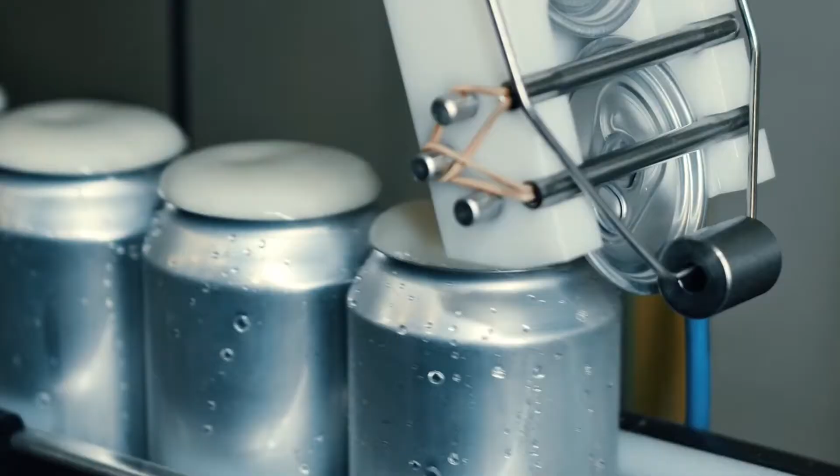Welcome to our third Flexibility Moment. Our webinar today will introduce you to the world of breweries.

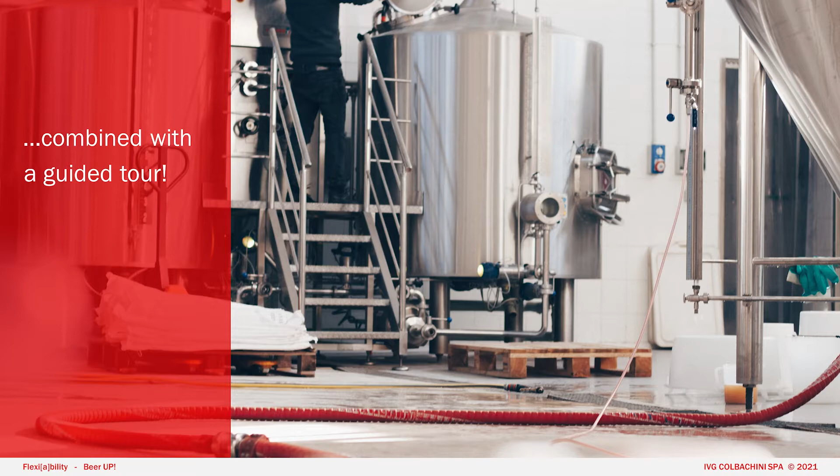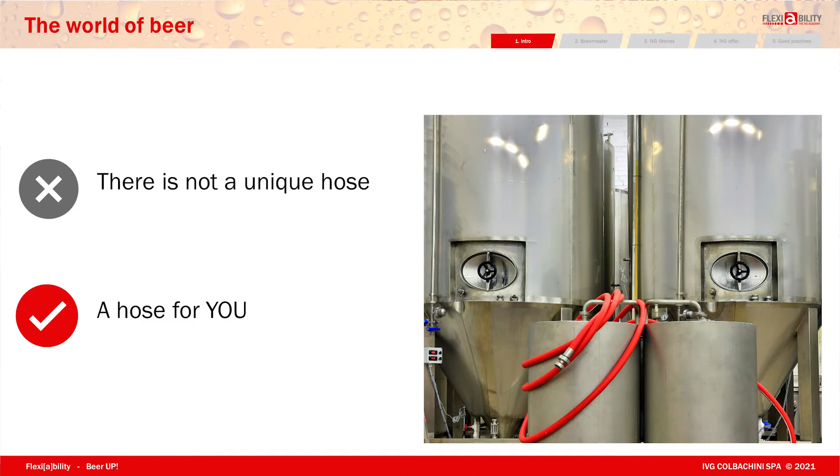It's very important, and I loved it - I tried it once in my life. You can see how the beer is made, and if you love beer, this is nice to learn. You can also show the beauty of our red hoses, so why not? Let's try. Thank you everybody for these few minutes with me.

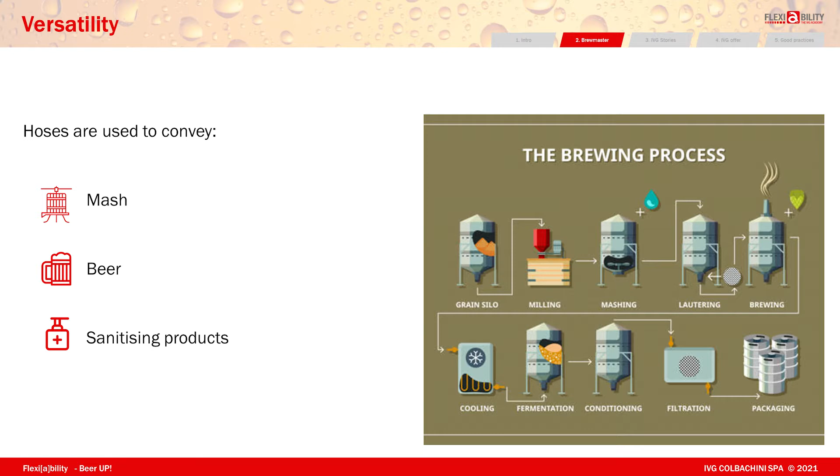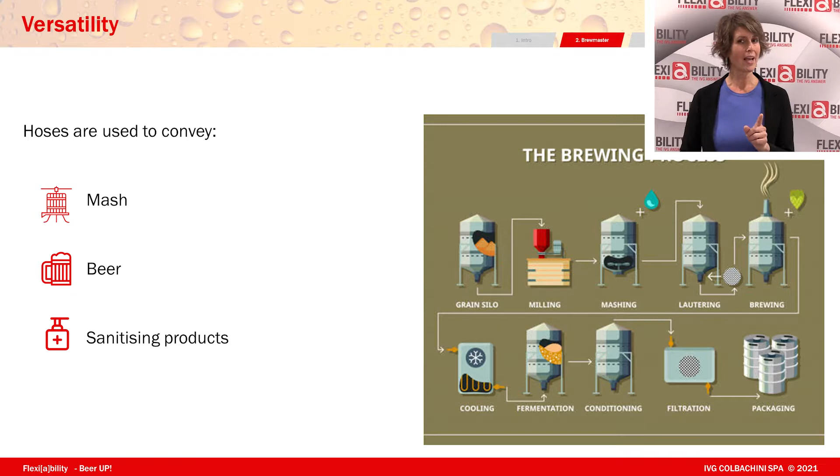Another important aspect for the brewmaster is versatility. The brewing process requires a lot out of a hose - it has to convey mash, beer, and a variety of chemical products. Some of these chemical products can even run at 80 degrees for up to 60 minutes, which is why it's important to talk about strength.

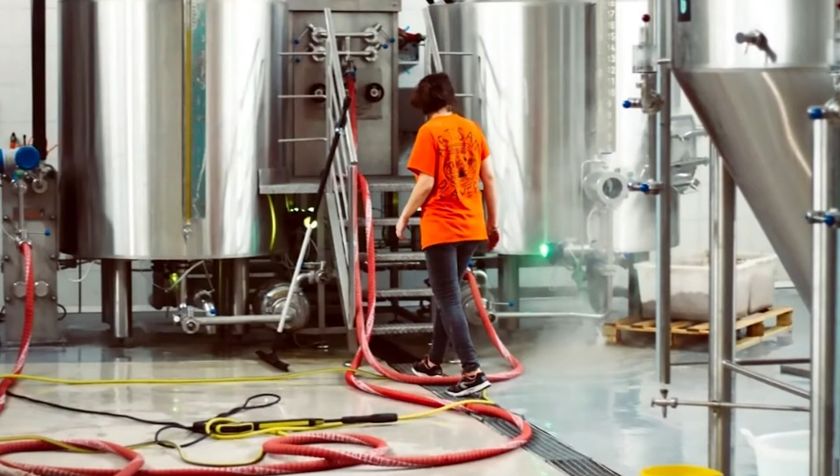Every day, hoses are subject to a variety of stress, depending on the equipment they are used on, the pressure ratings, and the temperatures, which can vary greatly from 0 degrees conveying beer up to 80 degrees for an hour conveying chemical products. Finding the right hose that can handle all these variables is important.

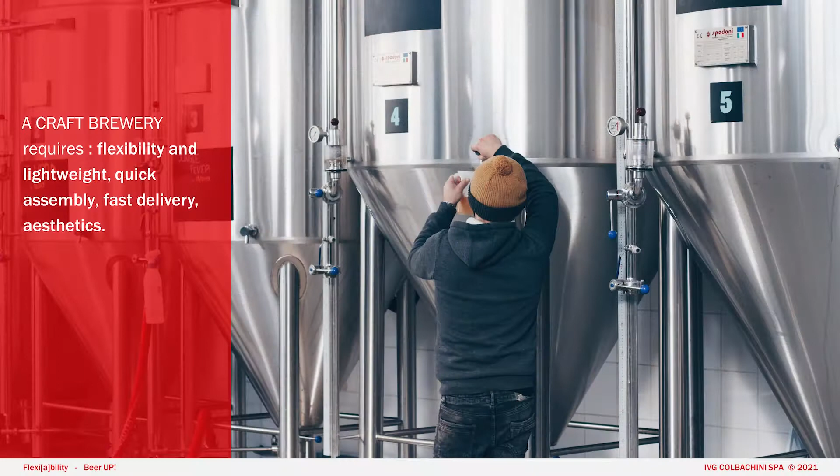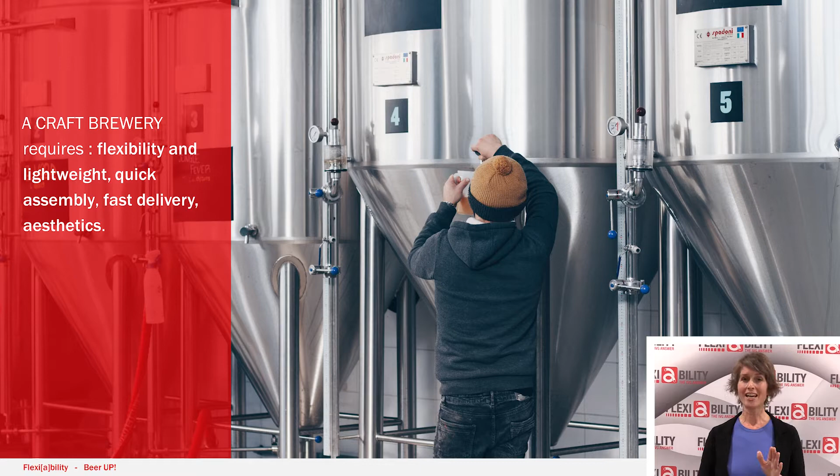As a rubber manufacturer, we like to think of the rubber hose as a trustworthy partner that can offer stability and duration over time. In a craft brewery, it's important to have a flexible hose. The same hose is used in all production phases and is manually moved from one piece of equipment to another by the operator, which is why it's also important to have a lightweight hose.

Substitutions of a hose are common. It's important to have a hose on spot that can be fitted by the operator, and thanks to our Easy Shell patented system, that can be done in just a couple of minutes on site.

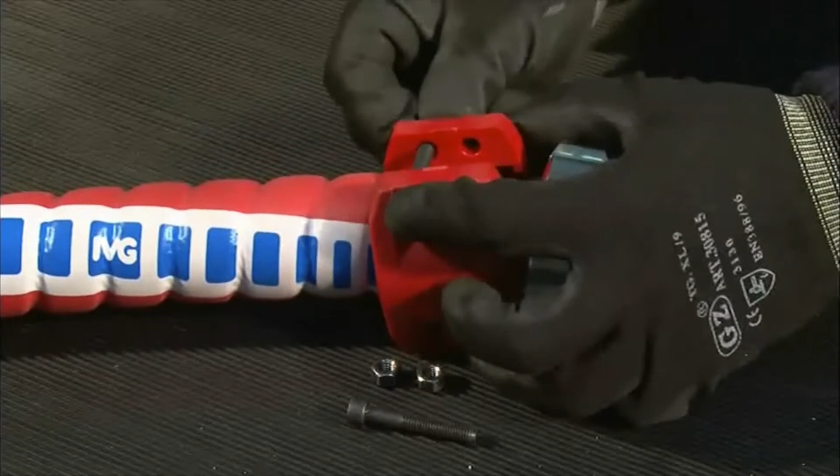Aesthetics are very important to create the right image of your product. Social media and introductions into your production unit create a unique opportunity to sell your product, and the IVG Made in Italy brand will guarantee that.

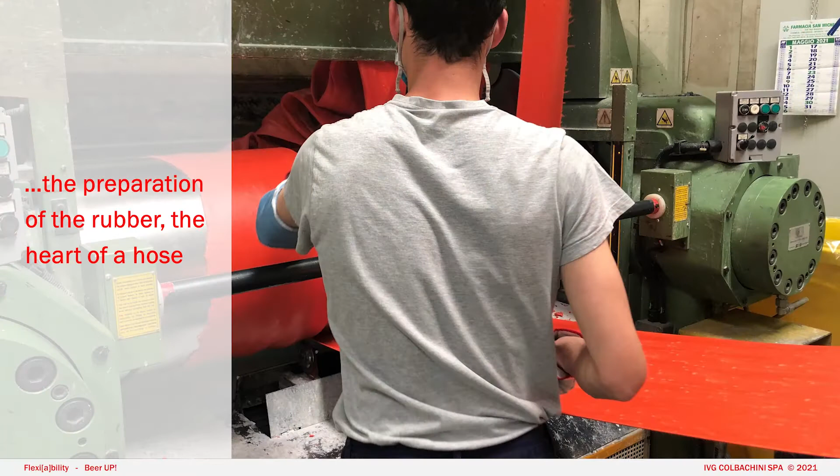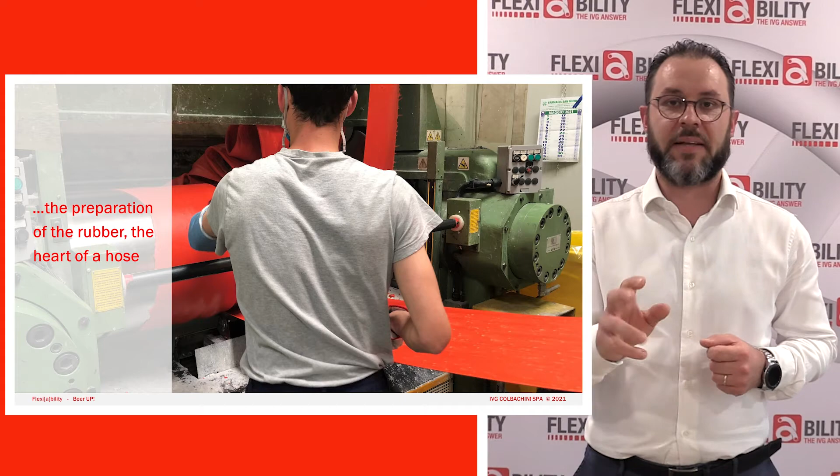The same passion that you feel during your brewing process, we feel it here at IVG. Why? When we produce our hoses, starting from the preparation of the rubber, which is the heart of a hose, the heart of a hose that can be the most suitable, the perfect hose for your plant and your beer. What is important for you is important for us, the result of our activity, the result of our production.

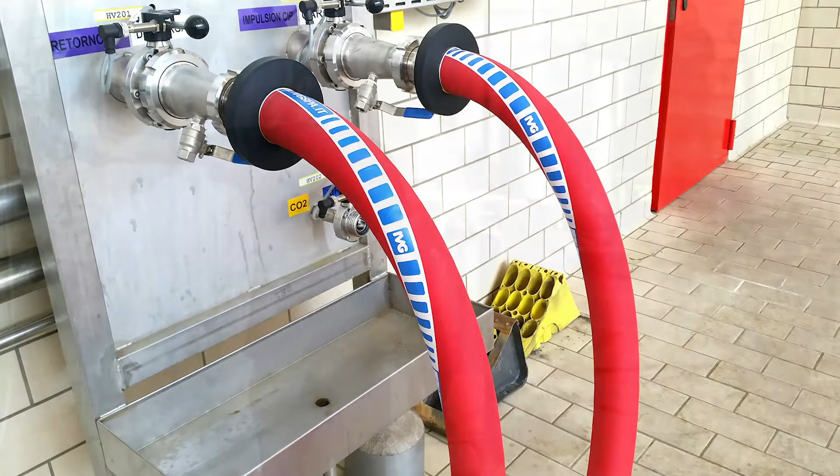We start in the same way, with the best ingredients, with the best materials to have the best result, and we take care of all the steps of our production. The rubber is very important. The rubber is the heart of a hose and can grant you probably the most specific and performing characteristics for your plant. It doesn't matter if it is big or small, because I can provide you with a solution, your hose, the perfect hose.

But let's start with two specific examples: Scotland and Vinoflex, two specific hoses for alcoholic beverages, such as wine, whiskeys, and beer. And now, each to his own. I mean, you can have your hose. For example, for beer, we have two options. We suggest two kinds of hose with the same compound in the tube, granting you resistance to high temperature for your cycles of sanitization. Also, it has a specific structure withstanding 10 bars working pressure and with a specific safety factor for the burst pressure. All of these characteristics are included in these two data sheets that you can download on our website.

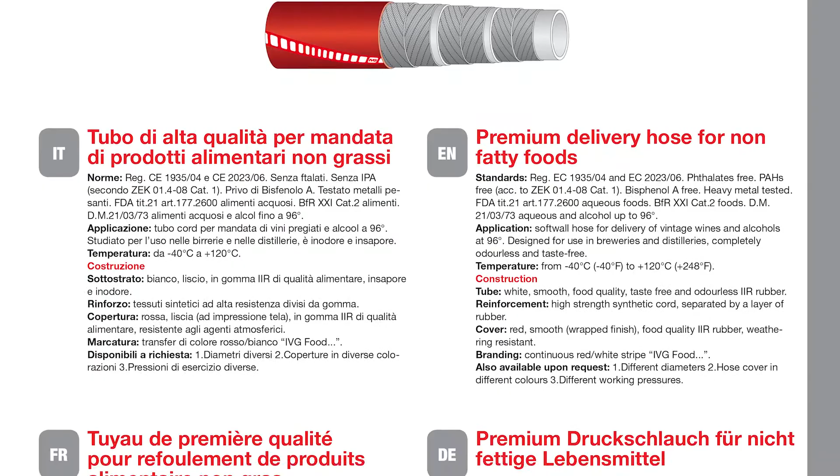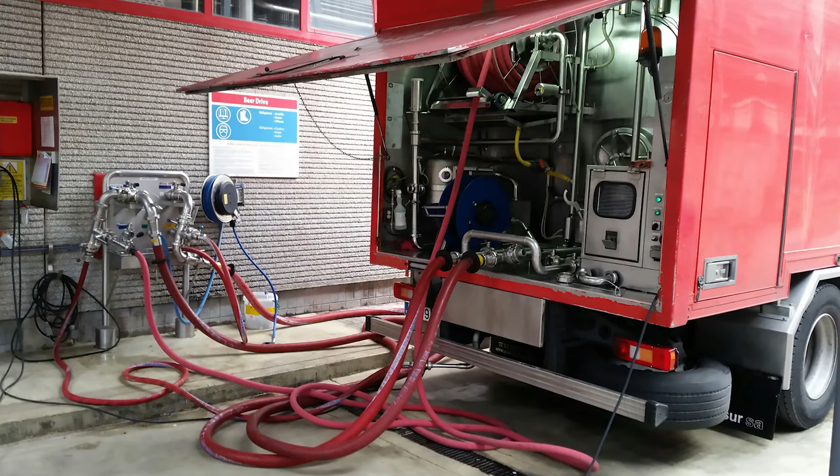But what differs? In Scotland, the one that you see here installed on a truck, you have a very performing hose, a very specific hose with a personality. I mean, you can imagine it like a stout, a Scottish ale, for example, because the structure enables it to withstand torque, twisting, and even installation on a reel or truck, as you can see. I took this picture in Spain, in a huge beer plant. It was installed in different stations for different processes, and the maintenance manager told me he was really satisfied because it was the solution for several services.

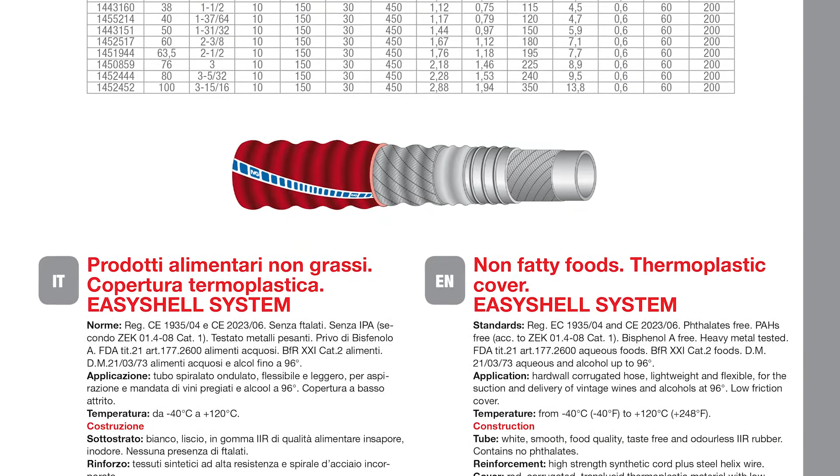But if your need is for a more flexible hose, you can turn to Vinoflex. It is suitable for smooth floors where its specific structure and external layers enable it to glide very quickly and fast, so even your staff will be grateful for that. I also call this hose a plug and play hose. Why? Because you can assemble it inside with the specific clamps, Easyshell.

Here they are. Avoid wasting time so the process doesn't end or stop for some hours.

Both hoses are manufactured in the same way, with the same principle of supply chain assurance that IVG guarantees. It's just like the brewmaster who selects ingredients, controls and respects them in order to have the best beer ever. Here at IVG, we manage the whole supply chain because all materials are manufactured in-house, even some couplings, so we can grant you complete traceability.

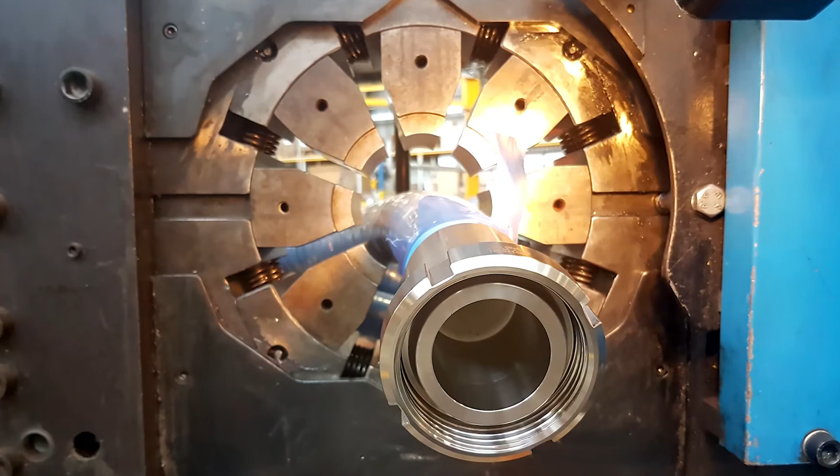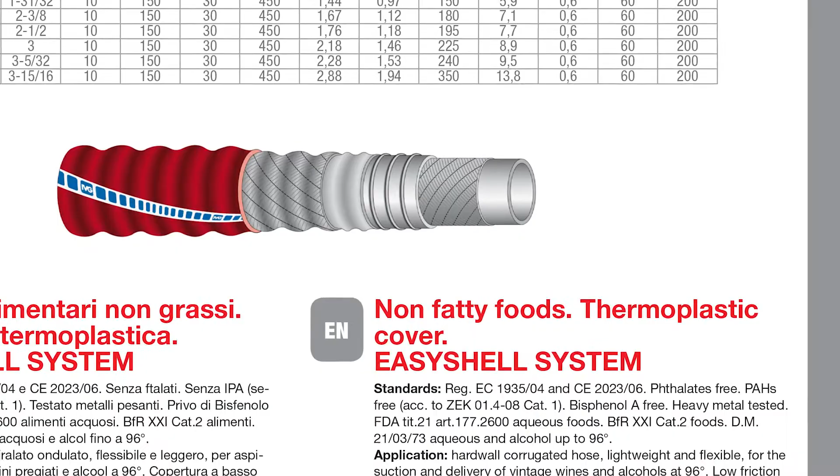Also on fittings, such as the EasyShell, for example. All of these characteristics, all the respect of the norm, are clearly shown not only in our process but also on the product, the result of our activity, the hose, with the specific transfer tape, with all the pictograms, but also in some particular features that we can adopt for your hose. What I mean is that we take care of the aesthetics, the outer aspect of the hose too.

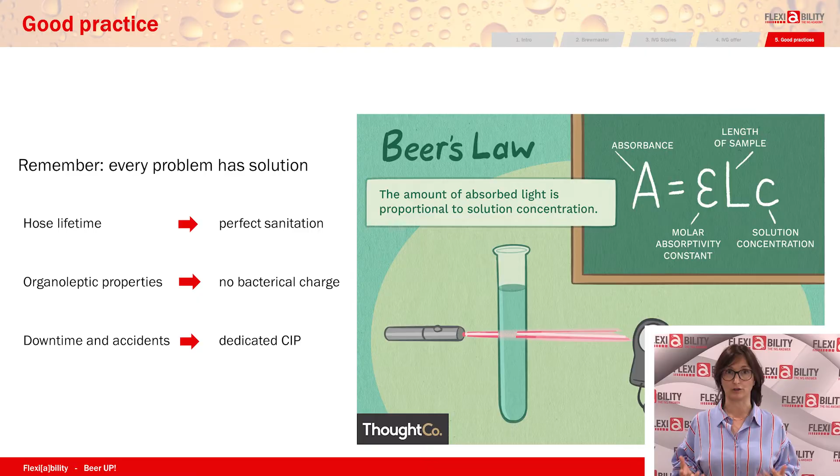If you want to maintain the organoleptic characteristics of your beer, you have to avoid bacterial charge in the hose tube, because you know that beer, apart from being a good nutritional source for humans, is also a good nutritional source for very unpleasant microorganisms.

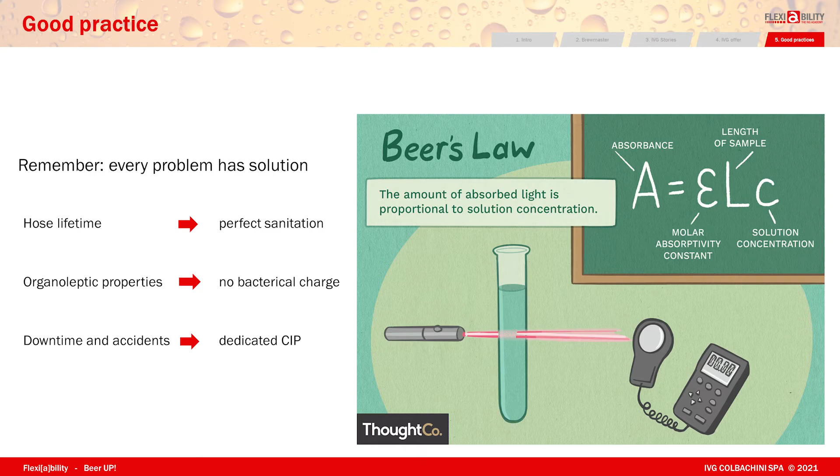If you want to avoid dangerous accidents and downtime at your plant, you need to perform dedicated CIP on every assembly you have. And remember, CIP is not an accessory part of the process, it plays a key role in it.

And now some general but really important information if you want to maintain your assembly in good condition for a long time. Never immerse the total assembly in sanification liquids, because only the tube has been designed for sanification and the cover might be damaged. Time respect is basic.

After a washing cycle, there should always come a complete rinse of the assembly. This will help eliminate traces of sanification fluid.

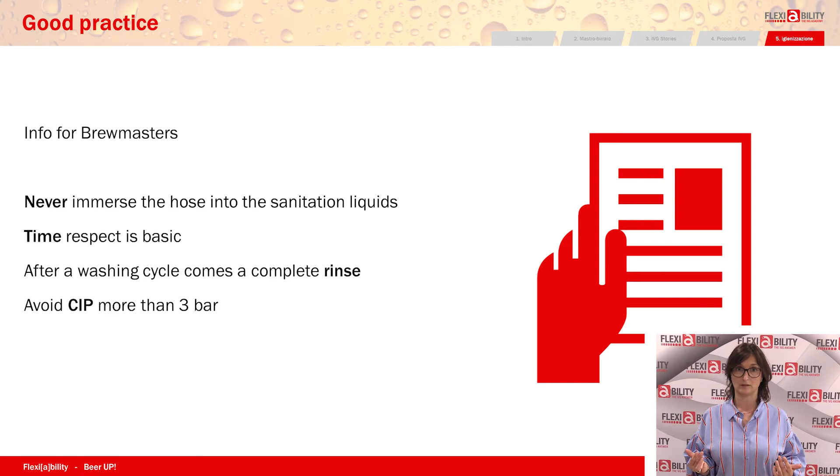And remember not to perform CIP at a working pressure higher than 3 bar, possibly maintaining working pressure constant during the time. Again, no beer stagnation in the assembly, because the hose has not been designed to keep the fluid in it.

Always stock hoses far from direct light and heat. Before using the assembly, always check the general condition, if there are holes, cracks and tears. Always use perforated plugs. This will prevent powder and external agents from entering the assembly, but at the same time will leave air flow into the assembly.